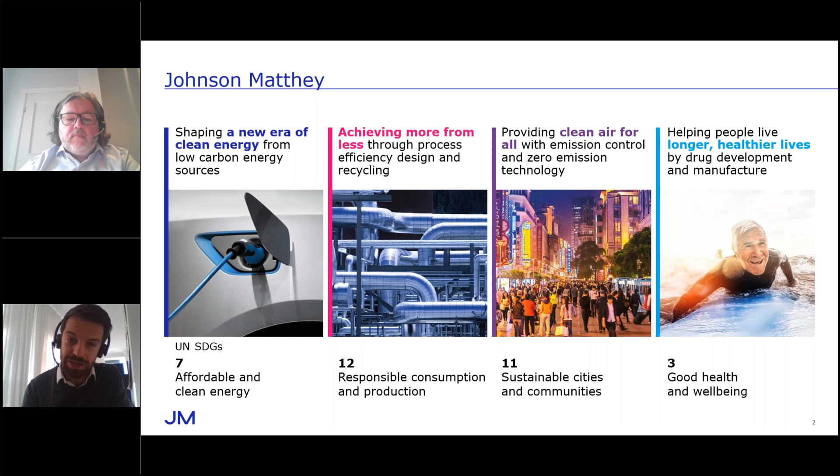A little bit about JM to start with. Johnson Matthey is a global leader in sustainable technologies, and our vision is for a world that is cleaner and healthier. Our main businesses are organized around firstly shaping a new era of clean energy, achieving more from scarce resources, clean air for all, and helping people live longer and healthier lives.

Philippe and I both work in the efficient natural resources sector, and we see digital or digitalisation as a critical enabler to all of our goals, and those are around helping our customers get the most from JM technology, and ultimately over time to work with them to help them navigate the energy transition and start to decarbonise their processes.

All of the projects that we run, including JM Levo particularly, take a customer-first approach, and that means that they're drawn from what we hear and what customers tell us about their biggest challenges, and that is often around optimizing performance and thus reducing emissions as business situations change, planning for maintenance or planning for turnarounds, or training and maintaining knowledge in their operators. And we actually see the real value from digital comes where you bring different aspects or different technologies and approaches together to provide a single kind of offering or platform, a bit like JM Levo.

What we've learned is, it's not just a case of having the answer, providing the advanced models and the automation, but also being able to bring to bear knowledge, connectivity, and think about the customer experience as well, because as I said, it's not just about having the answer, it's also how do you support customers to embed a new way of working in their operations and therefore make more informed decisions about optimizing their plants. So it's really about how all these things come together.

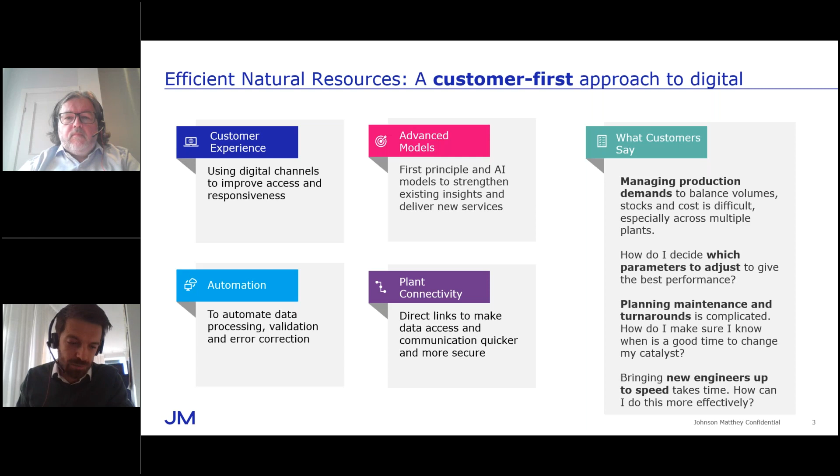JM Levo is hopefully a really good example of this, and it's around our vision for a data-driven partnership between JM and our customers. We started out a few years ago with a goal to take the high quality technical support and service that JM has always provided, improve on it, and bring to bear not just the additional value you can get from advanced analytics, but also improve the access, the customer experience, and the way people get in touch with JM in a more timely way.

We started in formaldehyde. We're just about to launch our methanol offering, and we've got more markets to follow. And I'm going to hand to Philippe now, who's going to talk a little bit more about the JM Levo formaldehyde offering.

Yeah, thank you, Paul. So as you said, for the formaldehyde offering, we've been working with customers since about 40 years back, getting the data to help them optimize the plant. And with JM Levo, we have taken a new approach, making the data sharing much easier and having better tools to use all the data we have accessible, feeding the data to machine learning models to optimize the plant, using the similar data for helping the customers in planning to make sure they have a smooth production with no interruption. And this has been launched more than a year ago now, and we successfully, and I think we can go on the next slide, Paul.

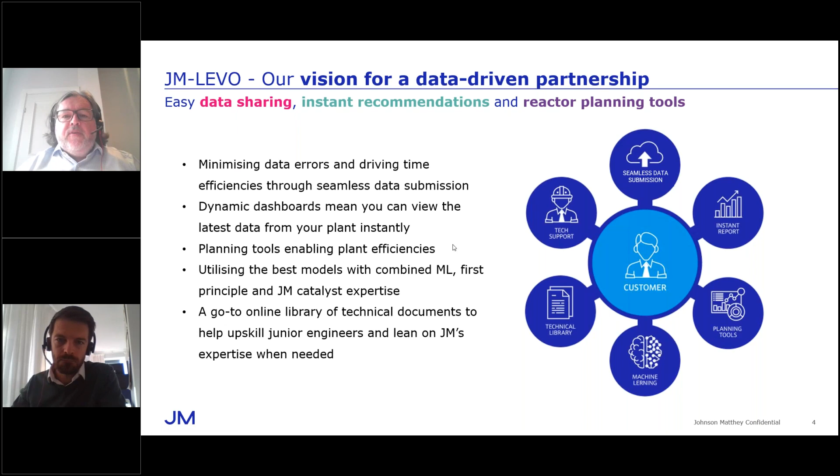And like Paul mentioned earlier, we've seen as well how this transition to a more digital world has changed the culture of the customers and impacted their behaviors. They have started to provide data more frequently, going from once a month or less to weekly. They've been using this optimization tool, where there is a machine learning model and other models behind it to provide the recommendations on how to optimize the performance of the plant.

And it also strengthened the interaction with the JM technical support team, and I think all the benefit they realize now is a combination of all these interactions and optimization tools. The feedback from the customers has been very positive. I think we have more than a dozen customers using it now, and they all acknowledge how it has helped them to optimize the plant, making the operation safer, steady, and reducing the methanol usage.

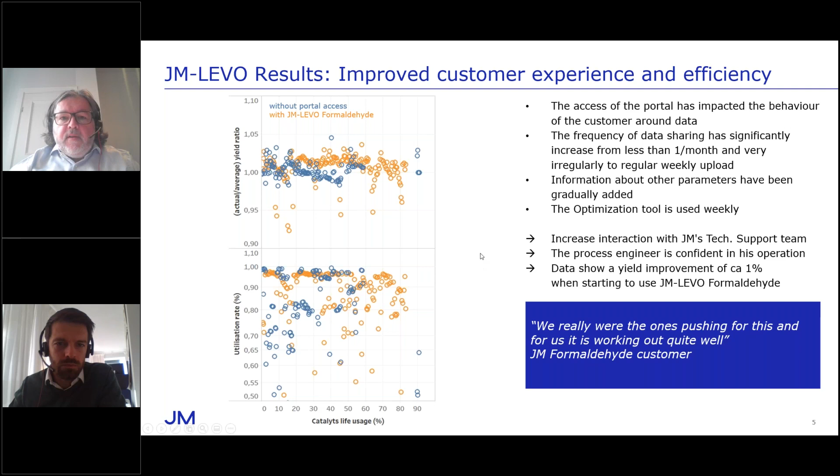Next one, I think that's it. So that was on the experience with JM Levo formaldehyde and how we've digitized the technical support.

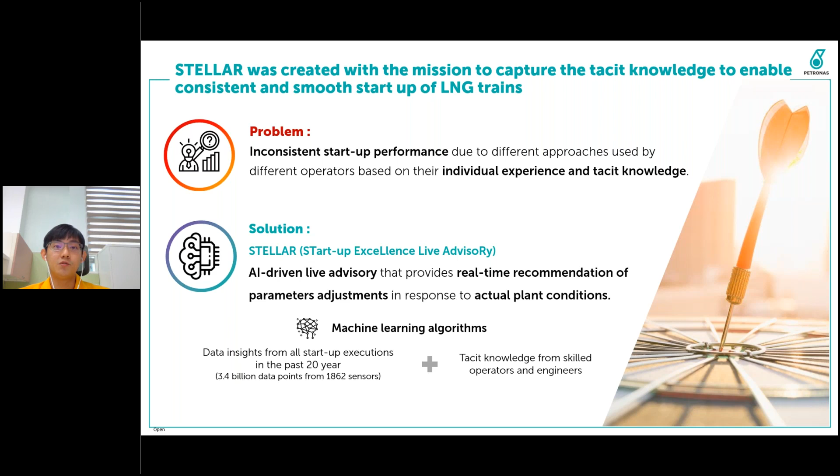Our process engineers would like to capture the tacit knowledge of our skilled and experienced operators in starting up the plant so that the capabilities can be passed on to the new team members. And as for our shutdown manager, he would like to achieve consistent and optimized startups so that the startup activities duration can be predictable for scheduling optimization, leading to higher plant utilization and more production.

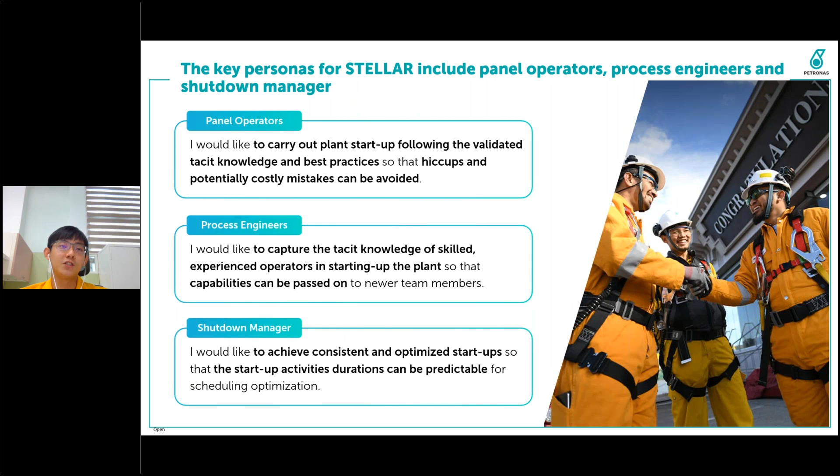So we are pleased to share that STELLAR has been successfully implemented in 5 trains in our Petronas LNG complex, which has 4 plants, 9 trains with a total capacity of around 30 million tonnes per annum. The results have been very promising, and I'll be sharing that shortly after we go through the details of the solution.

It learns the relationship between our input controllable parameters, such as the flow rate, valve openings, pressures, and temperatures, and the corresponding main cryogenic heat exchanger temperature and temperature rate of change profile. Now, by having this predictive model, we will be able to predict and simulate what will be the corresponding results if we were to control the parameters in a certain way. So this was heavily used by the operators and engineers to simulate under different conditions the best approach in starting up the plant.

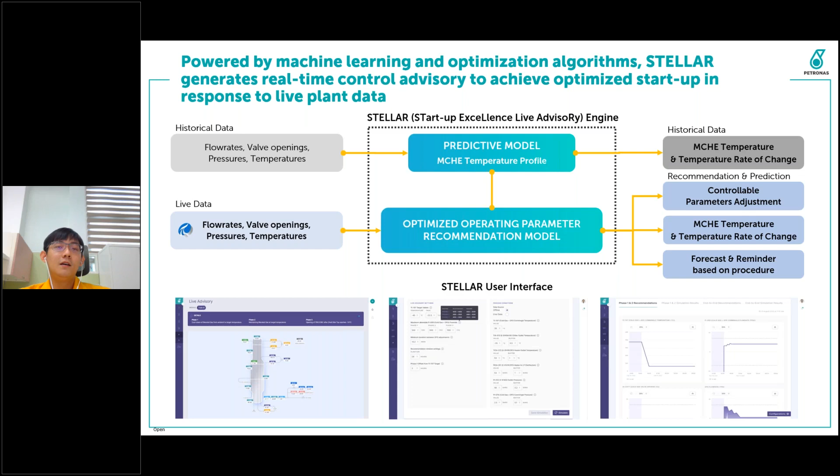Now, some of the feedback that we received from the stakeholders: we're happy to hear that the CEO of MLNG applauded the team for having the courage to innovate this plant startup approach, changing how things used to be done for the past 20 years, leveraging on digital and big data analytics. The operator himself was also very impressed with the results achieved by STELLAR. He told us that it's the best pre-cool down that he has carried out so far, and the advisory given actually helped him to achieve the optimum parameters and optimum values.

Our area manager was very happy that we managed to achieve 5 historical best pre-cool downs on startups. The process engineers were also very excited that in their plant, we managed to achieve 3 startups with repeatable and consistently superior results. And we have also heard that digital innovation has finally reached the operation team, improving the plant operation instead of just focusing on work process related use cases.

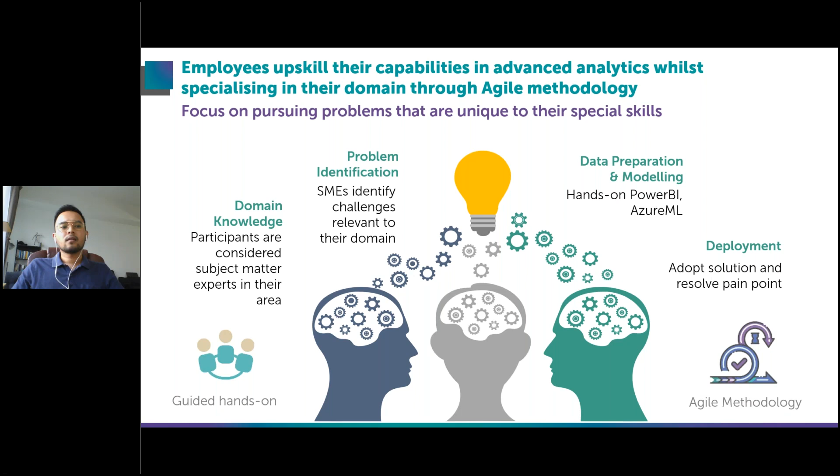So the real value from this program, the CA program, comes from helping the business by unlocking their potential value. By using Power BI, our participants will be able to perform descriptive analysis, and they can land on the right decision based on the data visualization and the insights trending generated from their report and dashboard.

And if we couple that with Azure ML modeling, participants will be able to perform predictive analytics, such as solving linear regression or classification problems, and use it as a solution to their business problems based on the machine learning model's result. All of these, as mentioned, are developed through iterations using agile methodologies in which participants develop incremental solutions in sprints.

This framework in citizen analytics has translated to improved productivity and work efficiency, better reliability that allows steady operations, and for some, cost savings and cost avoidance from the improved work processes.

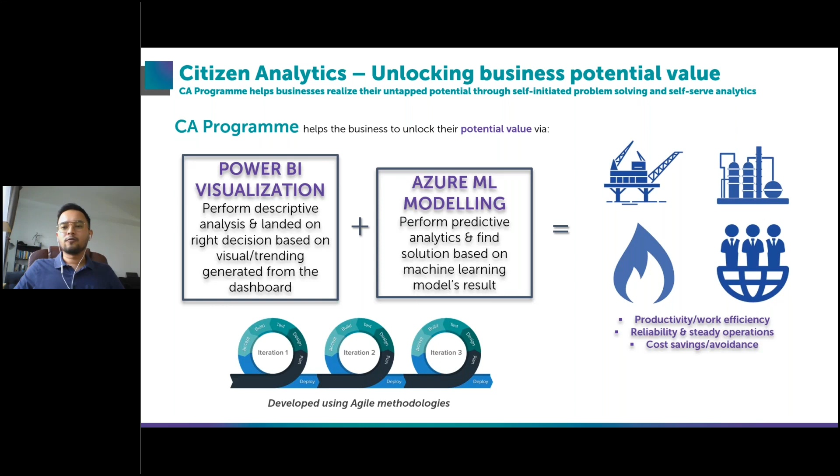Some of the personnel that have benefited from the program include plant engineers or chemical engineers who want to ensure that their measurement readings are not faulty. Some engineers use this to predict their online analyzer reading so they can have it as a secondary backup measurement. We also have IT specialists that use Azure ML Studio prediction to analyze the cloud storage required for the organization in the coming years.

For finance professionals, some of them improved profit and loss reporting with better and more dynamic reports. And finally, we have business analysts who want to start modeling complex data without extensive coding knowledge. All of these personnel come into the citizen analytics program and upskill themselves to develop Power BI reports and dashboards, and also machine learning solutions. We have many more personnel; these are just some of the prominent ones in our program.

So far our journey has taken us to great achievements. We have about 9,500 participants across the whole Petronas group, across around 61 departments and business units group wide. We have conducted more than 100 training sessions, and we have more than 150 coaches from Petronas Group Digital. Even now, we also have coaches from multiple business units through our Train the Trainers program.

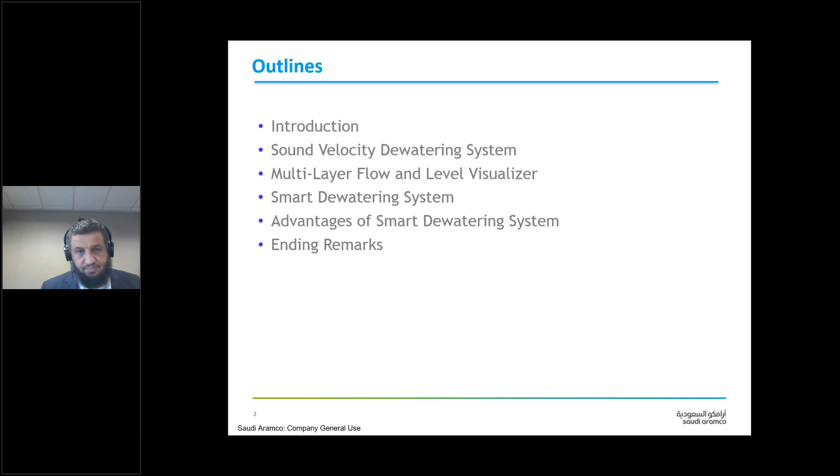Why do we need automatic dewatering? Basically, we need automatic dewatering to address known challenges in the oil industry: to mitigate hydrocarbon drainage, basically to drain water only, eliminating water overflow and preventing upset to downstream plant operation; to mitigate corrosion of the tank bottom plates; to eliminate manual dewatering, which requires many plant operators and a lot of time; and to minimize manual water interface measurement and the need for plant operators to climb the tanks to take this measurement.

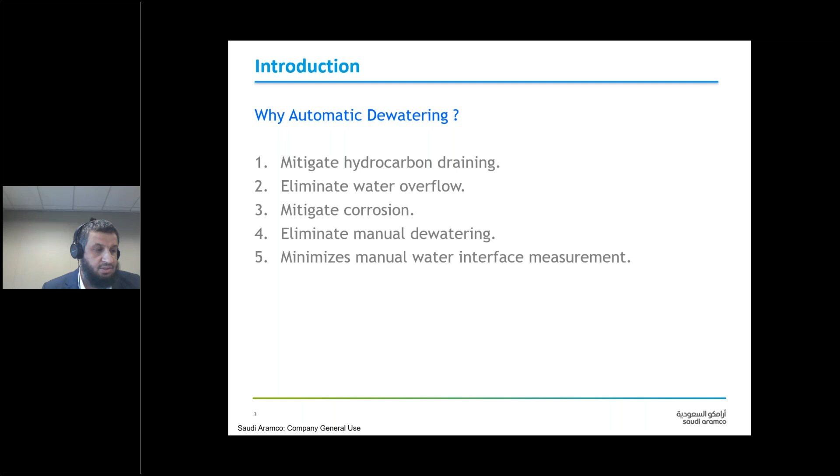Here is the solution to address these highlighted challenges: the smart dewatering system, which consists of 2 components, the sound velocity dewatering system and the multi-layer flow and level visualizer.

Allow me to elaborate on the first part, the sound velocity dewatering system. It consists of a smart sound velocity sensor, non-intrusive or intrusive, a control system, and an automatic control valve. The sound velocity dewatering system is a patented technology with built-in analytics, providing 3 parameters: the drain flow, the media recognition, and the drain valve status, whether the valve is healthy, stuck, or internally leaking. The system can be easily adopted, again because it can be non-intrusive, to provide an automatic dewatering operation.

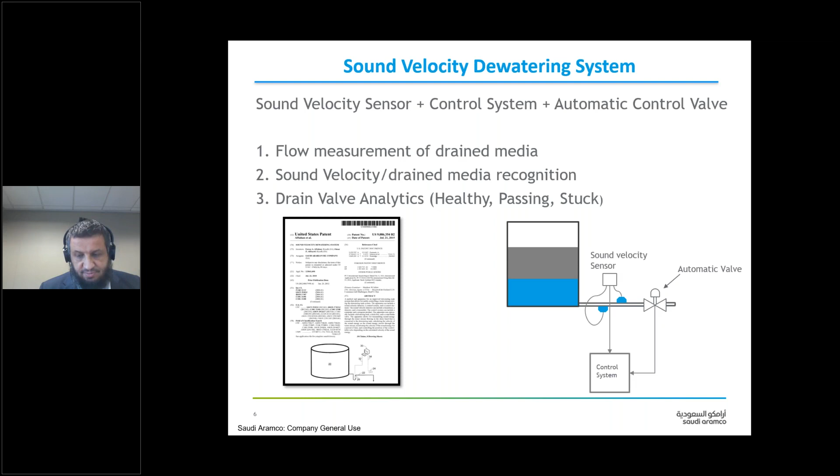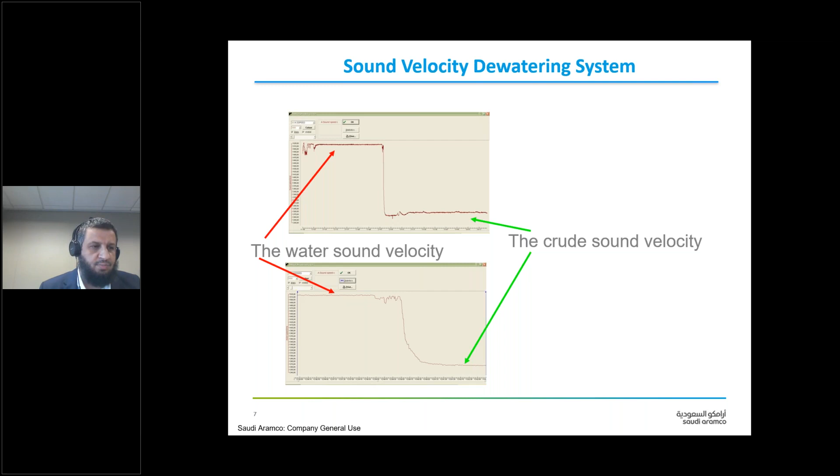As each fluid has a recognized sound velocity, the sound velocity dewatering system measures the sound velocity and recognizes the media in the drain pipe once the drain valve is open. First the valve is open, then the drainage cycle starts, and the sound velocity sensor begins recognizing the type of media to allow the flow to continue or to stop it once any hydrocarbon is detected. The system was deployed in Saudi Aramco.

This slide shows one drain cycle. When the drain cycle starts, the drain valve will open and the water is drained. When the sound velocity drops below a preset value, depending on the sound velocity of water versus the hydrocarbon stored in that tank, the valve will then be automatically closed.

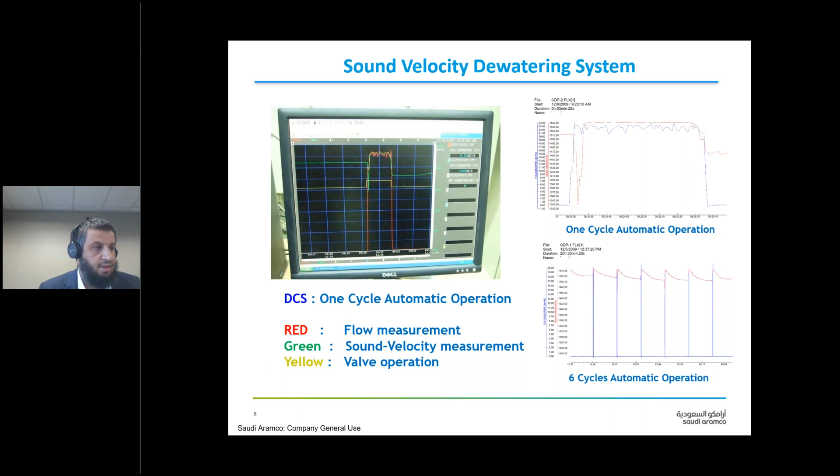This slide shows the first complete deployment of the sound velocity dewatering system, which was done in 2008 at one of Saudi Aramco's facilities, Riyadh Refinery.

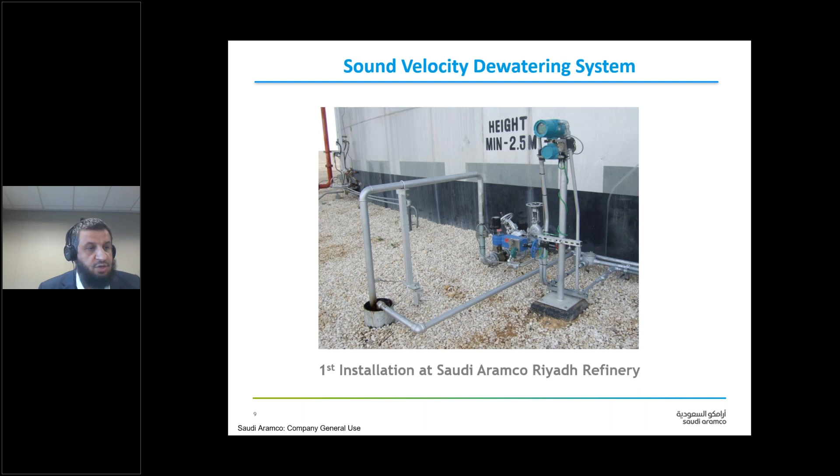The multi-layer flow and level visualizer is the second component of the smart dewatering system. It consists of an array of sound velocity sensors or other types of sensors. It's a granted and patented technology which provides 3 parameters: the total level inside the hydrocarbon tank, the water interface, and the temperature measurement.

It's worth highlighting that the multi-layer flow and level visualizer scope and patent goes even beyond the tank dewatering application and includes other interface applications in the upstream operation of oil and gas.

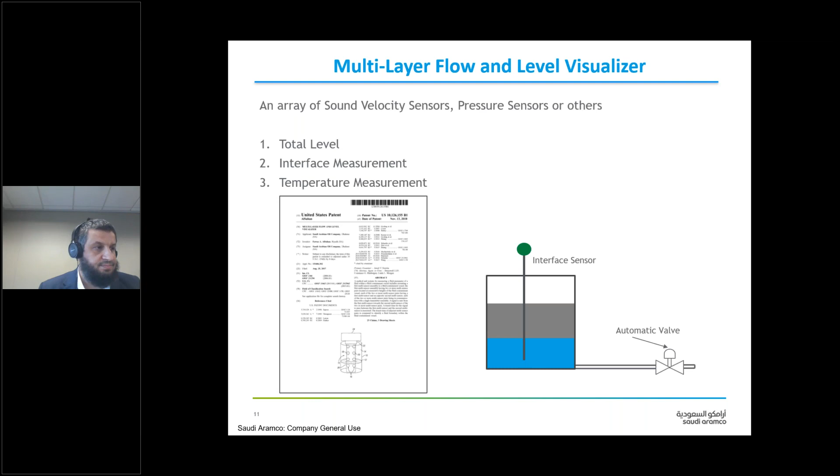Multi-layer flow and level visualizer is made of ultrasonic sensors, sound velocity sensors, or others, again an array of sensors. A very simple setup is a couple of pressure sensors at different heights, or basically electromagnetic signals through a probe.

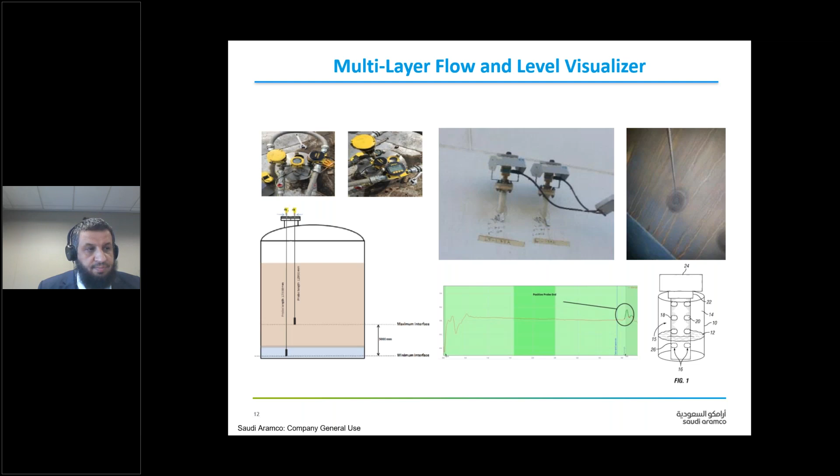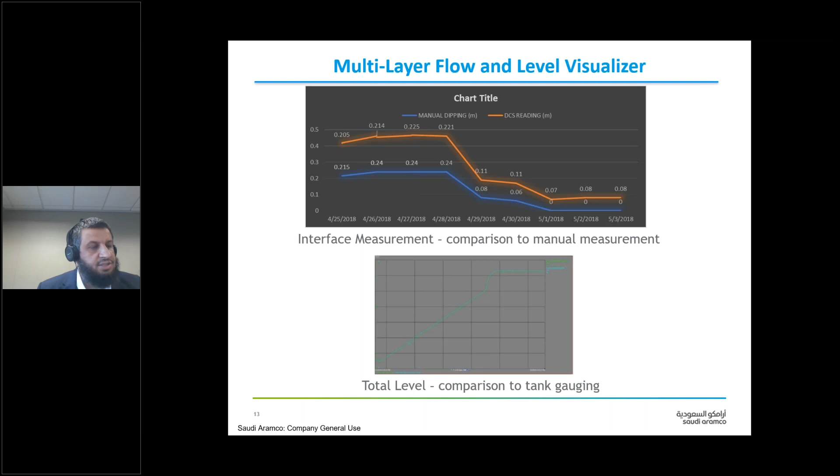Also, the total level measurement was matching, and the graph on the bottom of this slide is showing a comparison between the automatic interface measurement, the total measurement, and the existing tank gauging system, which also displays the total level measurement.

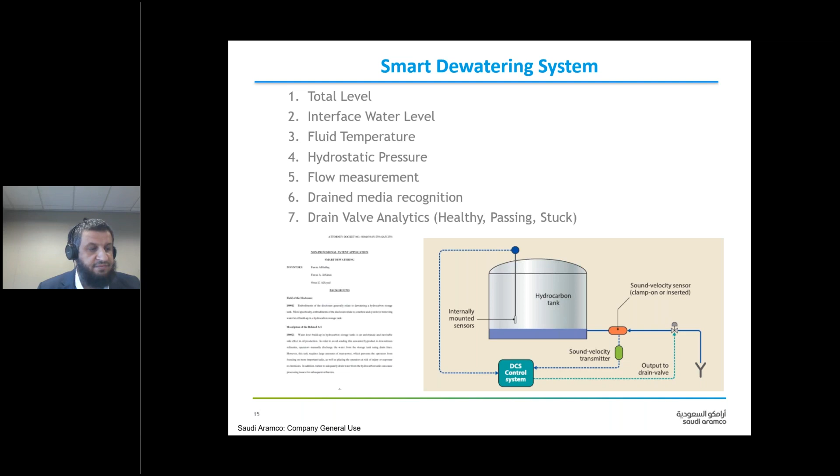Moving forward, let us now combine the 2 components together to build the smart dewatering system. It is a filed patent which can provide up to 7 parameters: the total level, the interface water level, the fluid temperature, hydrostatic pressure, the flow measurement, the drain media recognition, and a very important input is the analytics around the drain valve to indicate whether the valve status is healthy or not.

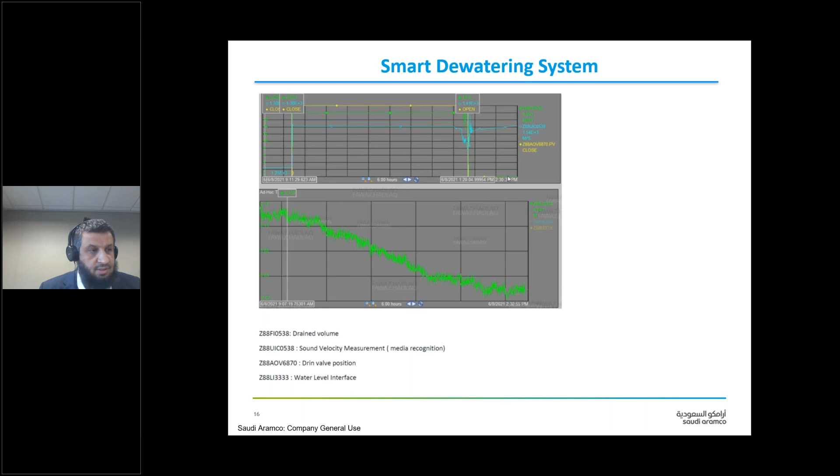Smart dewatering system provides many advantages to the oil and gas industry, as we have captured ourselves. Improving safety by ensuring zero hydrocarbon drainage to oily water sewer. Supporting the health of operators working around that system, so no more manual drainage, no more climbing tanks to take the interface measurement.

Smart dewatering is an IR 4.0 enabler, built from smart sensors and using data analytics. It addresses crude quality and hydrocarbon losses. It prevents water overflow to the downstream units in the plant and also to the customers.

Cost optimization was very much recognized, especially when comparing the conventional solution versus the smart dewatering solution. It's a simple design which can be adopted in running hydrocarbon tanks, which is another advantage we have seen when we started the pilot and even when we started deployment in different facilities.

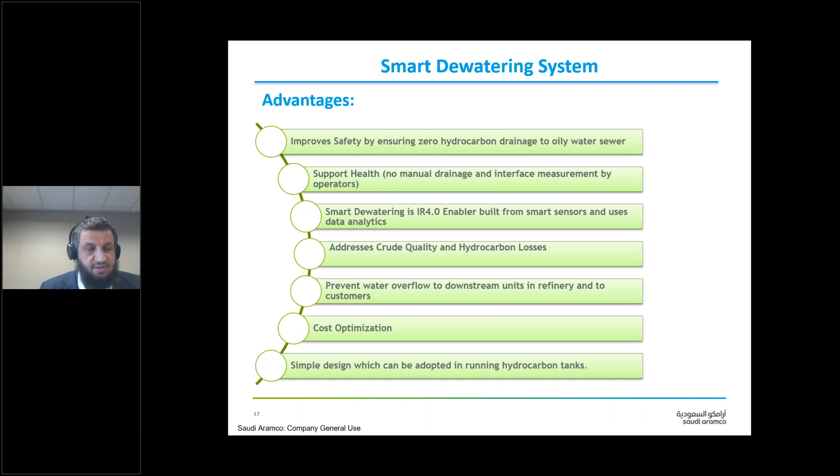Smart dewatering journey started in 2010 with the pilot and the first patent filing. Smart dewatering has 3 associated patents and has won many awards so far from Saudi Arabia, like the King Award from Saudi Aramco, the Gulf Engineering Union Award, and international awards like the ISA Excellence in Innovation Award.

We are also very honored to be an IChemE 2021 finalist for 2 categories: process automation and digitalization, and also for oil and gas.

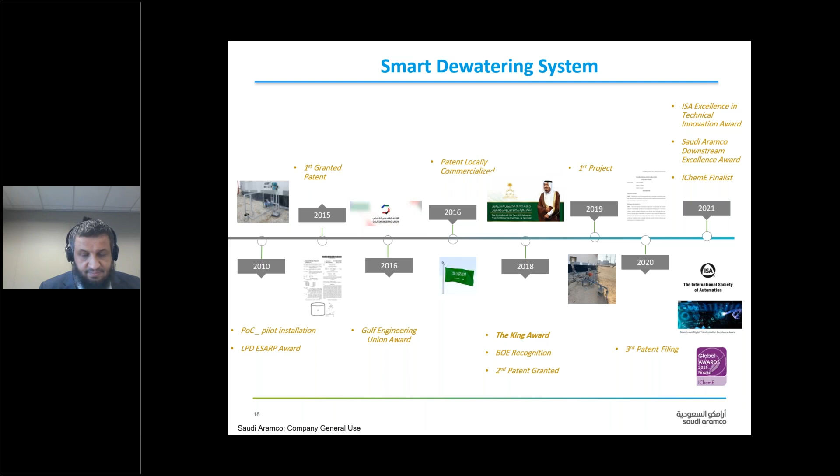To conclude, let me highlight a few points. Smart dewatering system is a digital transformation technology with 3 associated patents. It supports safety, environment, and health. Smart dewatering supports the recycle economy and net zero by eliminating hydrocarbon losses and emissions. It provides a simple and cost-effective solution for automatic water drainage and also monitoring the drain valve condition.

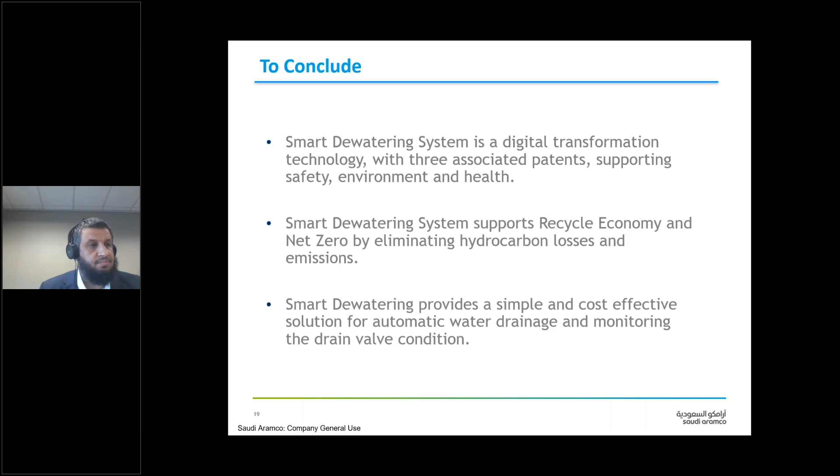Before I end my presentation, I would like to thank the Institution of Chemical Engineers for listing our innovation, smart dewatering system, as a finalist in the 2 categories, process automation and digitalization, and also for oil and gas. This is truly an honor for us.

Also, thank you for the opportunity provided to us, Omar Zaid, Fawaz Al-Hadlak, and myself, Fawaz Al-Sahem, to present our innovation to this great audience joining us today. And this is the end of my presentation.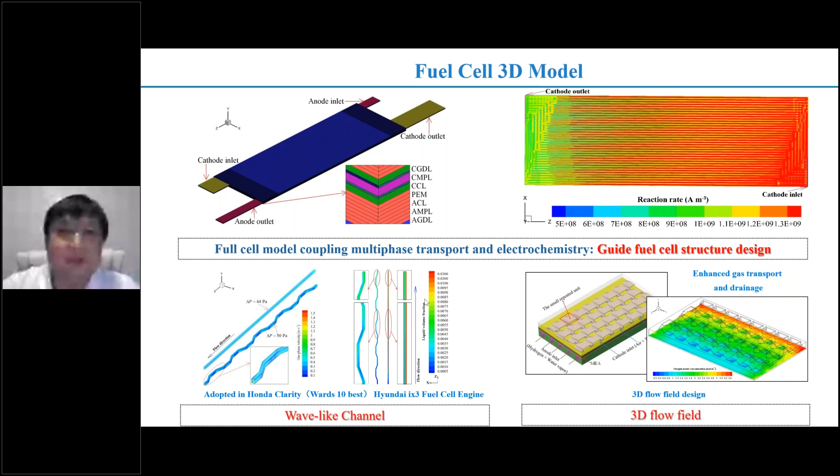We also coupled this 3D model with AI technologies to create the so-called fuel cell digital twin platform. The idea is that the 3D model can create lots of data for the multi-physics inside the fuel cell engine, and that data can be used to train a machine learning model so we can quickly predict the multi-physics distribution inside the fuel cell engine and optimize the design.

For example, how do we change the catalyst layer composition? How do we design a better fuel cell by combining traditional CFD technology with AI technology?

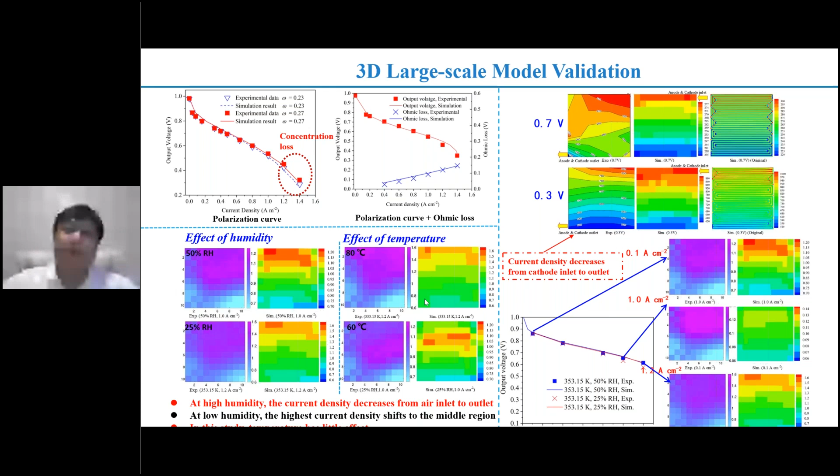Based on the 3D model and AI technology, we have proposed some novel designs for the fuel cell. For example, we proposed a novel dot matrix cathode flow field with a diamond-shaped flow field. Compared with a traditional flow field, it shows better performance but with lower flow resistance, which is very critical for fuel cell engine development.

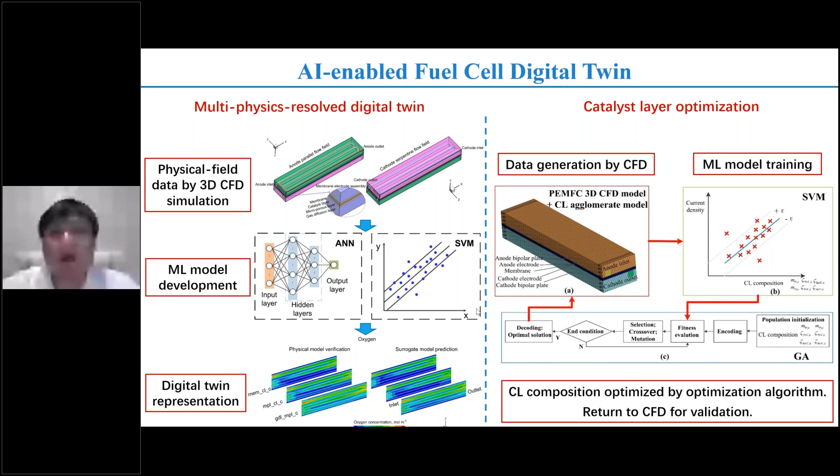Not only is the 3D model important for the structure of the stack, it's also important to design the microstructure of the electrode. In the catalyst layer we have nanoscale pores, and in the gas diffusion layer we have macro-scale pores. So we developed our own platform to first generate those structures, and then do optimizations.

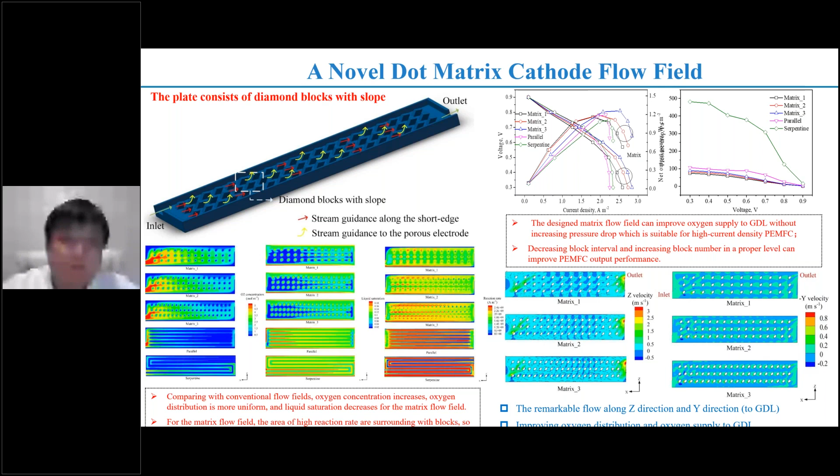We developed different generation methods—for example, to generate the microporous layer with different carbon powders, to generate carbon fiber papers, and to generate the catalyst layer with platinum carbon and ionomer structures. With this technology, we can generate whatever we want to represent the real nanoscale structures of the electrode, and then perform simulations to analyze the processes inside it.

For example, after cell assembling, how those microstructures are compressed by the bipolar plate and how the microstructure changes; and during operation, how water is produced inside the nanostructure and how it can be removed through those electrodes out of the fuel cell. This helps us design not only the stack structure but also the electrode structure for the fuel cell.

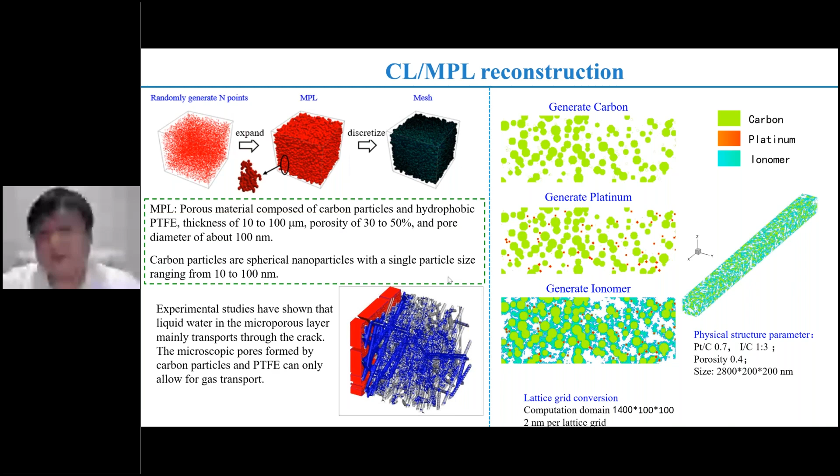Another simulator we developed for the fuel cell is the 1D and 2D models. This model is generally for control strategy and transient operation of the fuel cell. It's good for, for example, hydrogen recirculation operation and cold start during winter, where the fuel cell, with oxygen and hydrogen reacting, produces water that may form ice and freeze inside the cell. This dynamic model helps us optimize the control strategy.

How can we dynamically control the fuel cell to properly handle those transient operations?

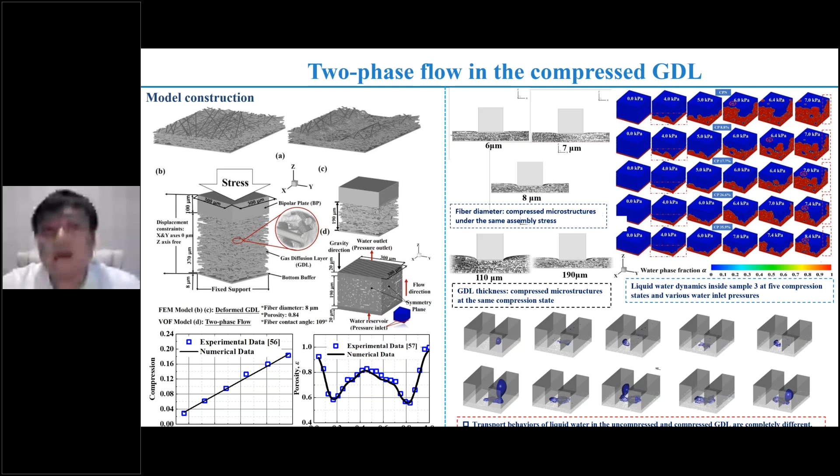And we also have developed a fuel cell system model together with the fuel cell, not only the fuel cell stack, but also with other system components. For example, the air compressor, the hydrogen compressor, the humidifier, the thermal management system, so that we can provide a system level simulator for people to optimize the fuel cell system.

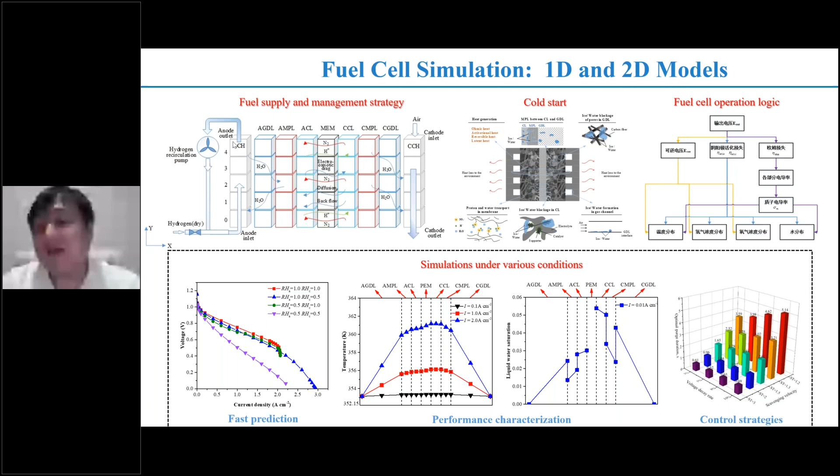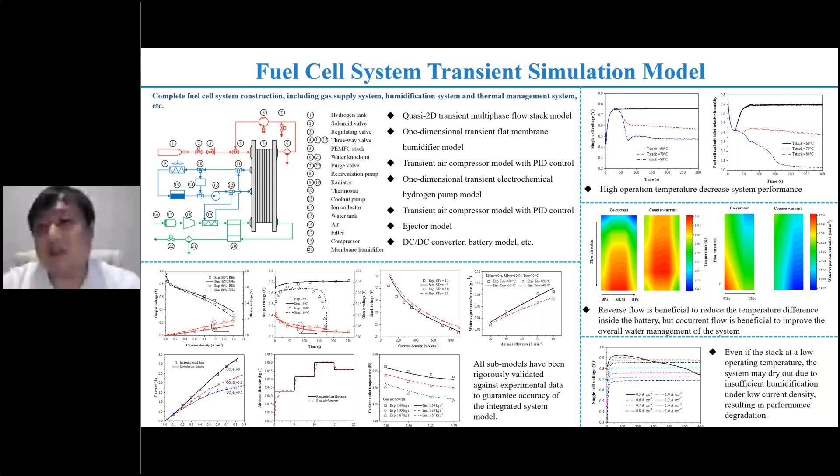So with this complete fuel cell simulator, those models have been comprehensively implemented in the industry, not only in China and the UK, but also in other countries. For example, we have been collaborating with Bosch for 3 years. Our model has been comprehensively used in the design for the fuel cell stack in Bosch, and also in Yutong, Great Wall Motors, SAIC Motors, and about 20 companies all over the world have been using our fuel cell simulator for their fuel cell engine development.

And we have also been leading some national and industry projects for the design and optimization of fuel cells. So with this kind of fuel cell engine simulator, we not only help the industry to develop their products, we can also propose a future trend for fuel cell engine development. For example, people have realized that we have to increase the power density of the fuel cell engine from 3 kilowatts per liter to 9 kilowatts per liter in the next 10 years. But how can we do that?

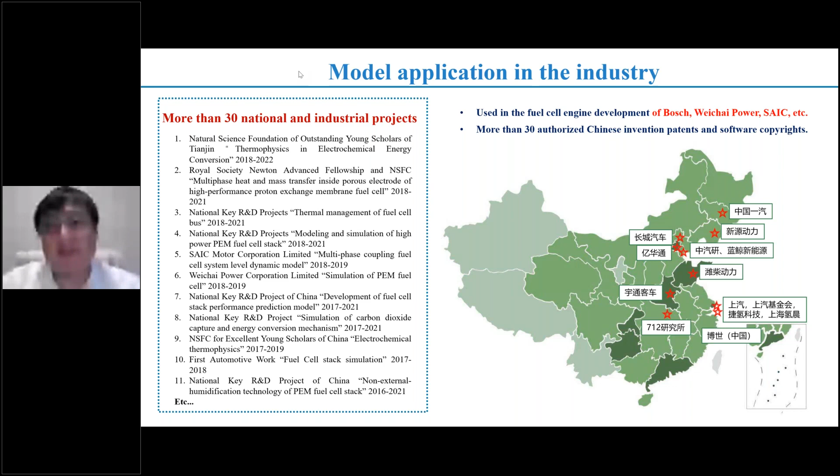In this way, the fuel cell simulator will be a very good tool for us to see how we can achieve this high power density design, so that based on our fuel cell models, we have provided detailed and quantitative technical indexes of the components, how each component can be optimized and redesigned to reach the high power density requirements for the next generation fuel cells.

And this work has been recently published in Nature as a 9 pages long article. Myself and Professor Xuan are the first 2 authors and the corresponding authors for this paper. So that's generally the brief introduction about our work, the virtual fuel cell simulator work.

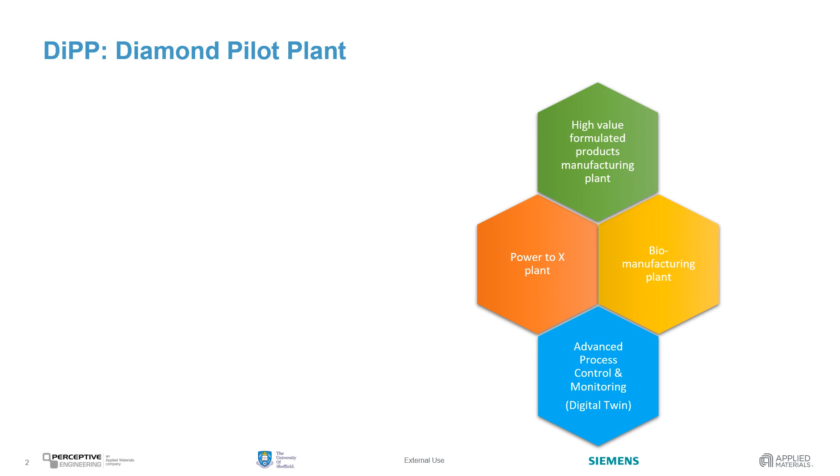Hello, I am Professor Mo Zandi from the University of Sheffield. This is a double act presentation, and alongside me, my colleague Dr. Eduardo Lopez Montero, Senior Engineering Consultant at Perceptive Engineering, is helping me to share the project results with you. The University of Sheffield installed a world-leading pilot plant within the Faculty of Engineering in 2018. It is named the Diamond Pilot Plant, or for short, DiPP.

DiPP is capable of manufacturing pharmaceutical tablets from blends of model active ingredients and inactive media. This includes key powder process steps for formulated products manufacture, such as crystallization, blending, granulation, and tableting. The new continuous powder processing plant emphasizes the importance of complex particulate products and formulated products more broadly in modern chemical engineering, and we are also reflecting this in our new curriculum in chemical engineering. It is truly research-led teaching.

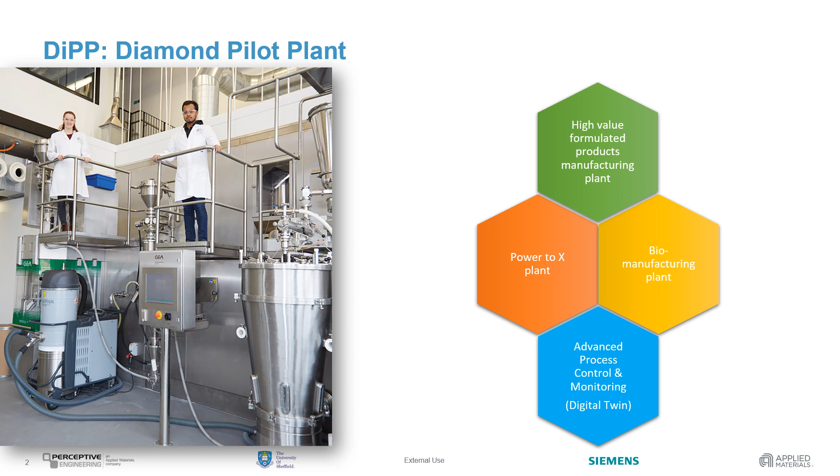DiPP's key features include a dedicated industrial control room to accommodate an advanced control system and a digital twin of the plant. The continuous powder processing plant in DiPP, including the continuous crystallizer, was provided by different manufacturers and vendors, and was not IoT enabled. University of Sheffield, Perceptive Engineering, and Siemens joined forces to develop an innovative solution to digitalize the whole continuous drug manufacturing process from crystallization to tableting machine, and converted it into the world's leading Industry 4.0 demonstrator.

The main objective of the project was to adopt a data-centric approach and automation, and to demonstrate facilities to test and validate potential IoT applications in the real world.

Also, existing knowledge from technical personnel could not be fully leveraged when controlling the processes, ultimately making the operation of the pilot plant highly manual, resulting in a considerable workload on operators. Therefore, the University of Sheffield wanted to develop a solution that could improve the system operation and overcome these challenges.

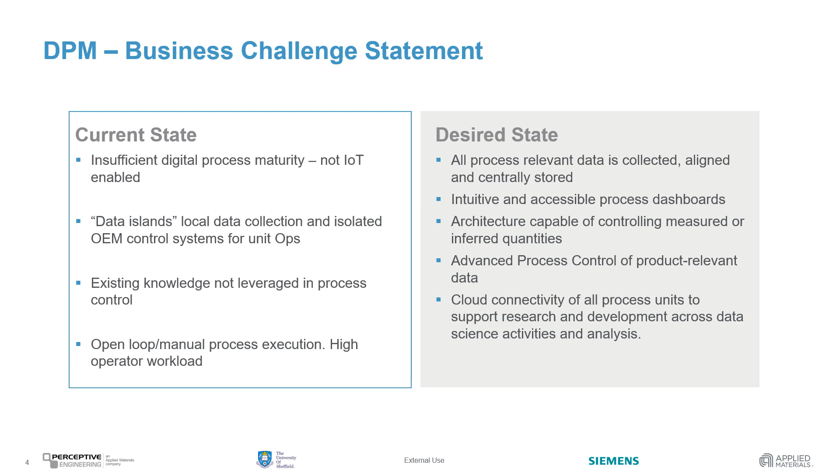Essentially, Perceptive's PharmaMV software was used to read and write data to and from all sensors and process units, including Siemens MindSphere, and the software used to run the digital twin. This facilitated access to all data from a single interface.

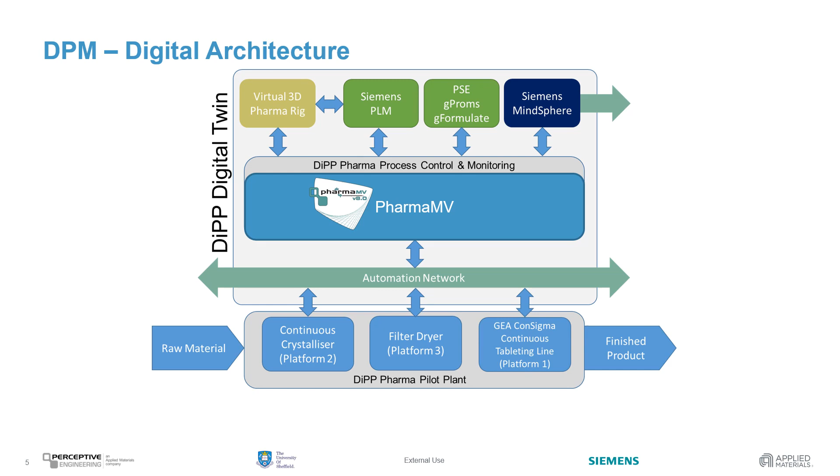This digital architecture enables a synergy between statistical and nonlinear models, providing a complete set of tools for monitoring, advanced process control, and machine learning, a seamless integration with process units and PAT instruments, and also enables data fusion and alignment across the full platform.

After PharmaMV was set up as the single point repository for all equipment's data, the optimized experimental design platform was configured for each of the process units at the Diamond pilot plant. The OEDP is a solution built upon Perceptive Engineering's PharmaMV software and provides the workflows and tools for rapid process development using optimized experimental design techniques.

These techniques include automated design of experiments, machine learning for self-optimization and automated model adaptation, step testing, and integration with mechanistic digital twins for development and deployment of advanced process control. The OEDP includes pre-configured tools and embedded documentation to reduce overall configuration and development effort.

All these tools can be accessed via interactive dashboards, so operators at the University of Sheffield can navigate across all the process units, drill down to specific parts of the system, and activate any of the digital tools using such interactive dashboards. The platform also supports user authentication with different levels of access. For example, users that are only allowed to monitor the system, to administrators that can trigger APC and make changes to the OEDP solution. In summary, the OEDP enables smart process development for the crystallizer, filter dryer, and the continuous tableting line.

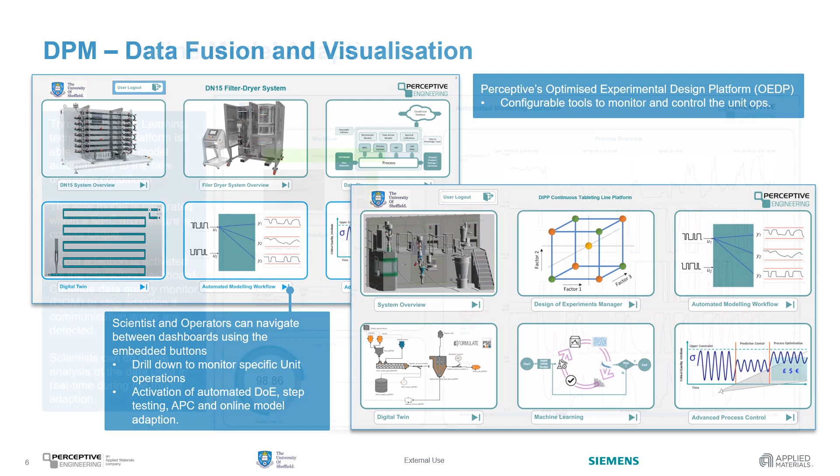Operators can activate and configure the automated model adaptation via the panel at the left-hand side of the dashboard. The platform will continuously monitor the quality of the data and will notify operators of any interface communication errors. The platform will stop any response test or DOE if such communication errors are detected. It is worth mentioning that the data from any automated response test is uploaded to MindSphere in real time to allow scientists across the University of Sheffield access to the data for analysis and research activities.

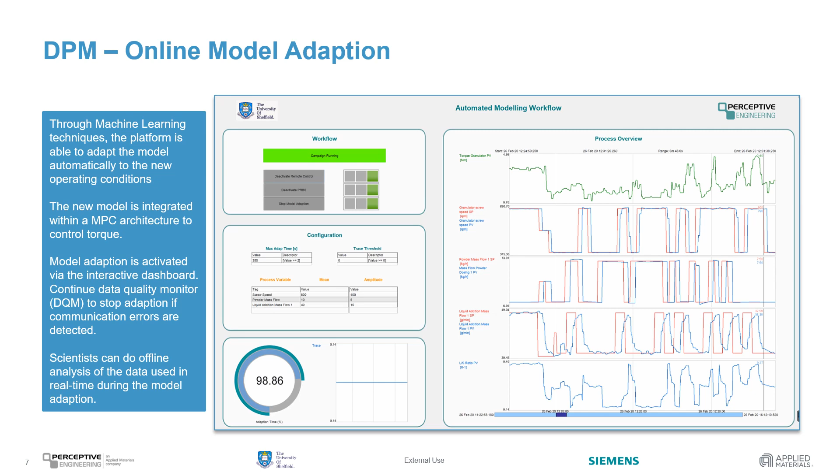One of the main goals of the project was to upload the data in real time to MindSphere, which is Siemens' leading industrial IoT as a service solution. Two Siemens nanoboxes were interfaced to PharmaMV to enable the possibility of pushing data from all process units to the University of Sheffield's MindSphere account.

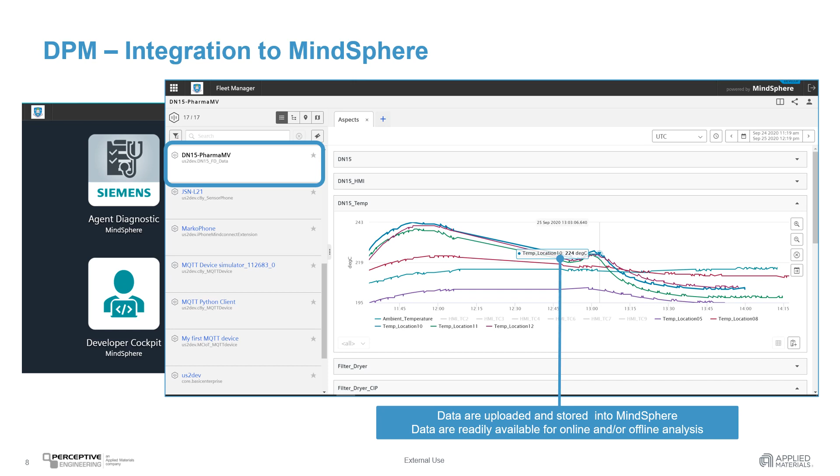The importance of big data visualization as a tool for Industry 4.0 is widespread and well documented. An example of the benefits of this project is the integration of web-based data visualization tools such as Wiz through MindSphere. To give both industry and academia access to the data, here Wiz provides a one-stop shop for data analysis and visualizations. Scientists and non-scientists can use the platform to better understand the data, analyze it, and make informed decisions.

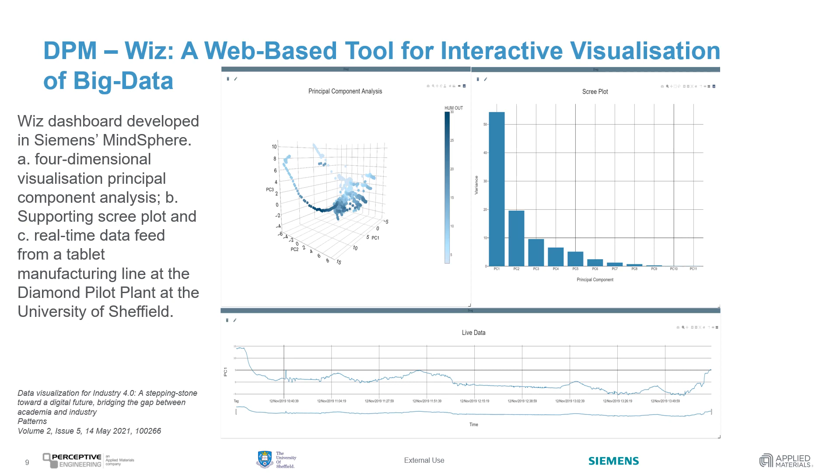Provides an opportunity to access and optimize low-level control systems in a pre-competitive environment and allows development of a service-oriented business model. The digital control system was developed on Perceptive's PharmaMV software, which provides a full suite of analytical modeling and APC tools for rapid process development and optimization. It allows fusion and visualization of process and analytical data in real time.

For the pilot plant, PharmaMV enables the prediction of critical quality attributes using data-driven models and digital twins. It also enables the implementation of model predictive control for CQAs and can be interfaced to Siemens MindSphere to transfer data in real time to the cloud.

Some of the main benefits of this digital control system are that it provides the university with a demonstrator of a state-of-the-art automation using an industry-proven 21 CFR Part 11 compliant platform, delivering a practical learning experience of an industrial continuous powder processing plant to undergraduates and access to manufacturing plant equipment to research teams.

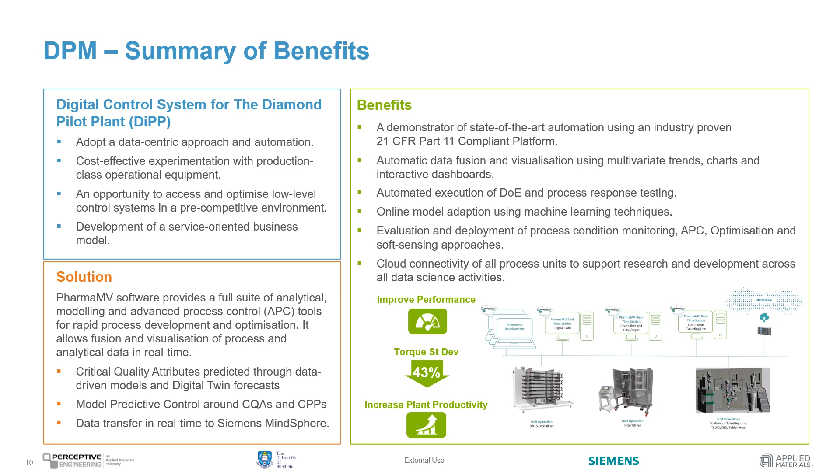It provides automatic data fusion and visualization using multivariate trends, charts, and interactive dashboards, automated execution of DOEs, process response testing, which reduces operators' workload and streamlines data generation for optimization, analysis, and research. Online model adaptation using machine learning techniques allows the evaluation and deployment of process condition monitoring, APC, optimization, and soft sensing approaches, and enables cloud connectivity of all process units to support research and development across all data science activities.